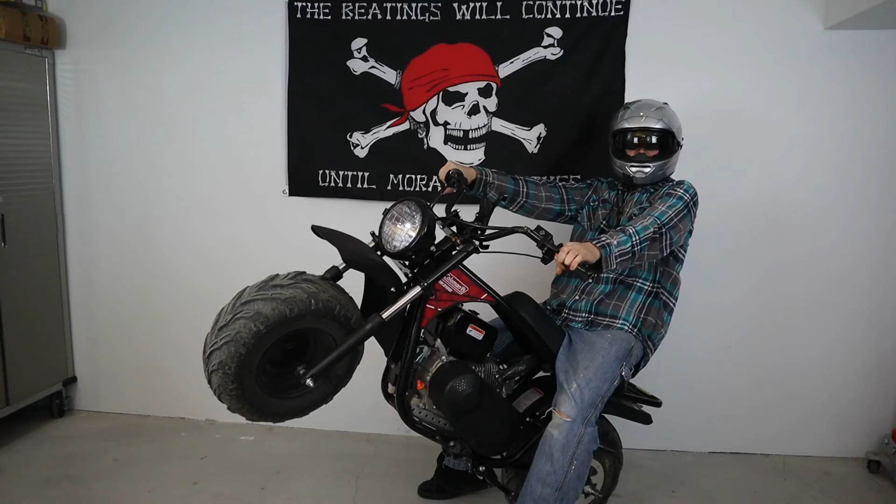I will show you the tools, the parts, and the performance upgrades that you get from it with top speeds. Let's go ahead and throw a baseline measurement in. Let's start with out of the box top speed. Tillotson and a Predator, both 212cc engines.

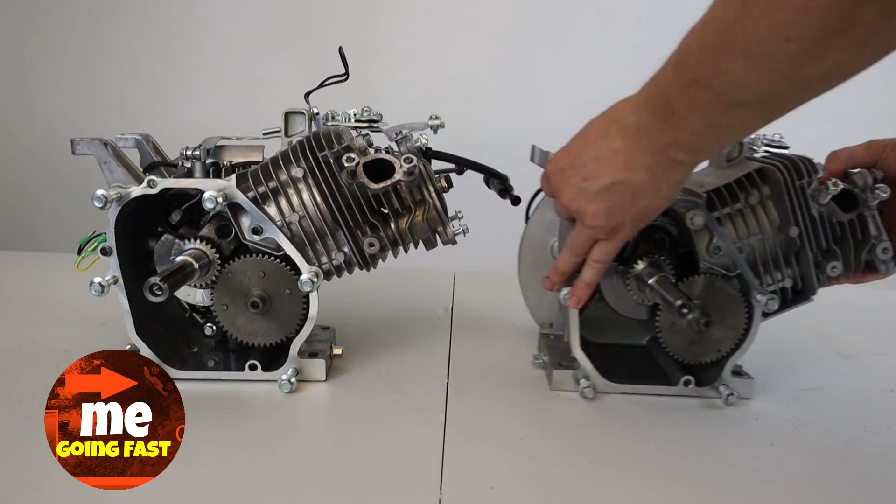Doing an intro, I'm doing an intro now. Isn't it neat? Doing an intro, cause I'm doing an intro now. Look at my feet.

I like mini bikes. I need more mini bikes. So seriously though, this is one of the most comfortable mini bikes that you can get on the market today. It is a very comfortable ride. It is a very nice ride. Well, it wasn't that interesting.

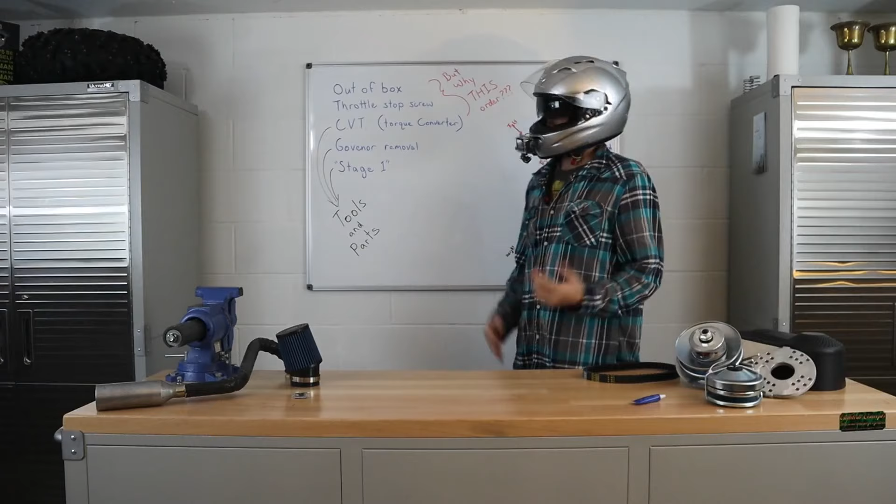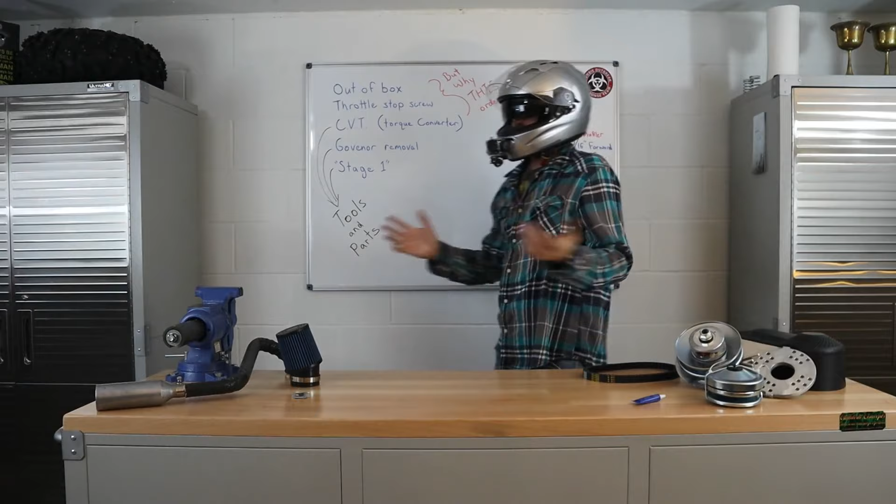Let's pull back the throttle stop screw. The throttle stop screw is what really limits the engine from revving up to where the governor does kick in. We'll get to governor removal later on in this video, but right now let's just take a look at what top speed you're going to get with the throttle stop screw pulled back.

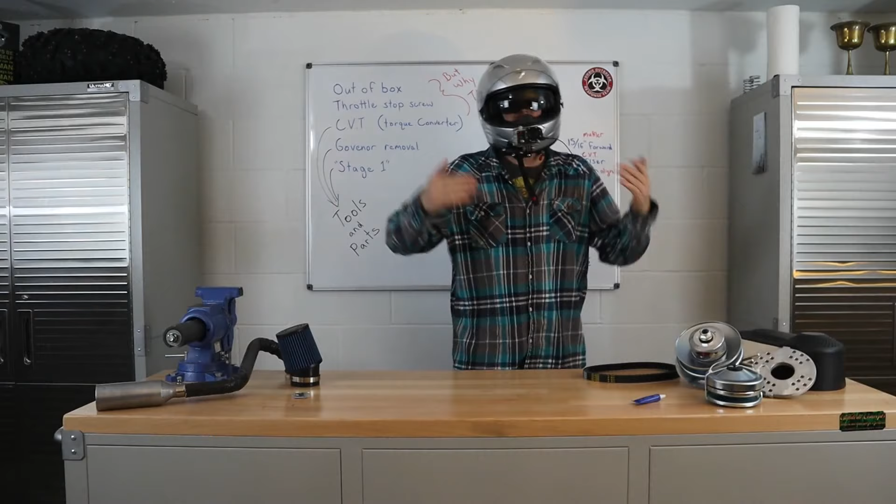Now that we got the throttle stop screw pulled back, you may feel the surging in the engine, and that's the governor kicking in. We're going to add our torque converter right off the bat. Personally, I think that if you add the torque converter first, you're going to get the most out of your mini bike. So if you don't have all the money to put into the stage 1 kit and the torque converter and the risers and all your mini bike upgrades, I'm going to say let's start out with the torque converter. All right, let's take a look at the tools that we need to get that riser made and that torque converter in place.

What we're going to be looking at here is a metal file, a chain breaker right here. Safety glasses are a big recommendation. A safety shield of some sort is also going to be a high recommendation. Hacksaw or another cutting tool. I switched over to a metal grinder, and with the metal grinder you want some hearing protection.

2 9/16 inch wrenches, 8mm, 10 millimeter, 12 millimeter, and then to actually adjust the chain tensioners on the back after we put the new chain in, a 14 and a 17 millimeter. A 3/8 inch drill bit, and what I'm going to recommend is that you take a look at step drill bits. I like preserving them with a little bit of engine oil on the tip, just so they don't heat up and wear out.

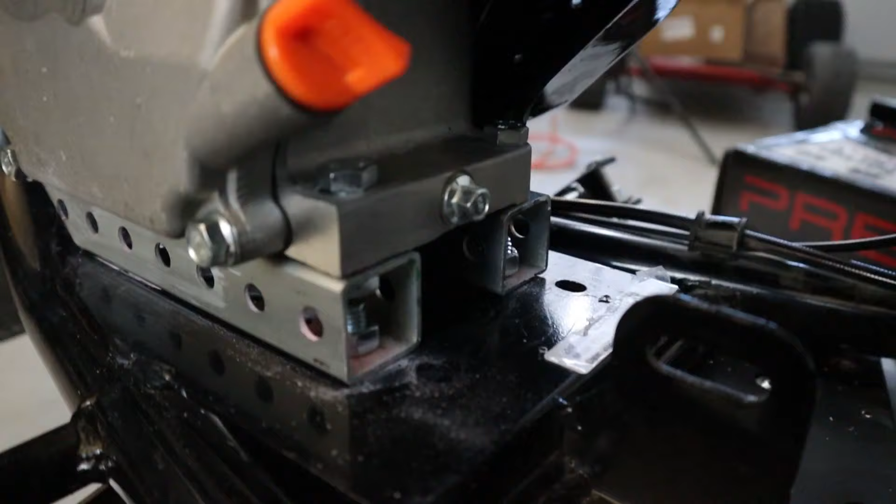Now a little bit of a tip right here is going to be a magnetic reach. I love using a little magnetic reach on the end of a bolt or a nut to be able to place things exactly where I want when I'm aligning things.

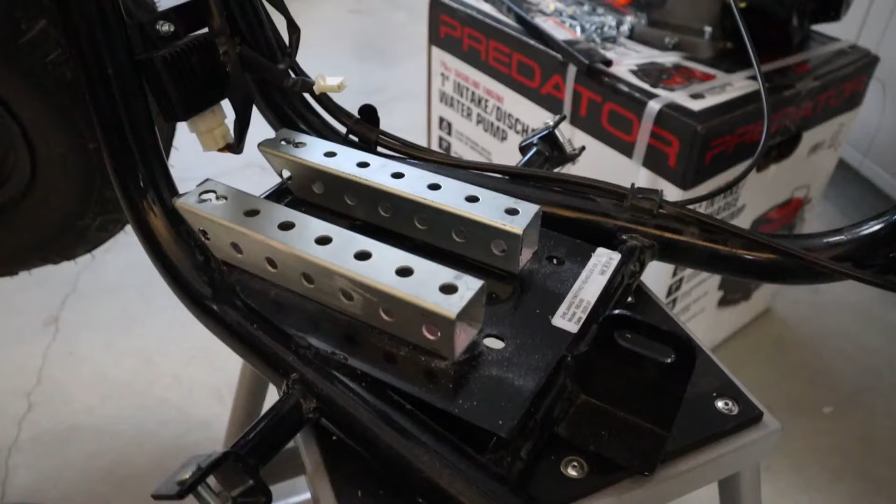Permanent marker. Spray paint. A light colored spray paint is going to be great to mark holes so you get more accuracy in your drilling. Yes, I'm going to be giving you some measurements throughout this video for how to set up the riser or this, that, or the other.

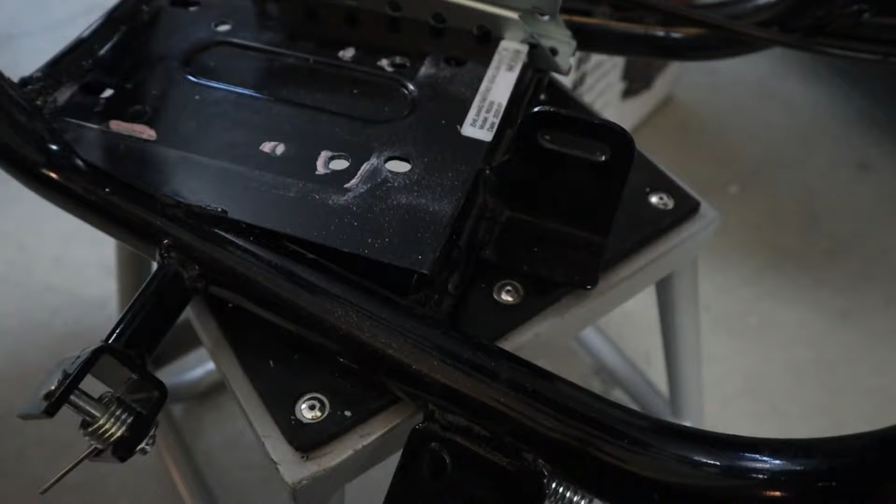Double check your measurements. When the frame comes, it's not going to be exact. Put your risers in place. Put the engine on the risers. Line everything up with the torque converter. Make sure the chain's aligned.

Use a little bit of spray paint just through the edges. A little bit of fine dusting. You can see your holes more easily. But double check your measurements just in case something on one of the parts that you ordered is a little bit different from what I'm working with here. And then the last thing we'll need is a ruler.

Let's get moving forward and take a look at the parts that you need. And then we'll go right into making the riser, putting it on the mini bike, and taking a look at the top speed and the gains that we get from that. All right, let's take a look at the parts. And I'm going to cover these two as well because a lot of people will be asking about them.

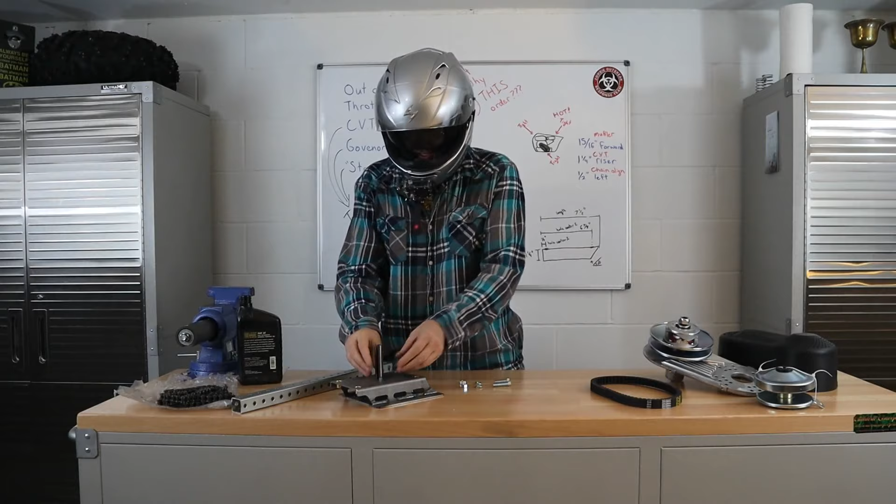Let's look at the parts that you need to actually put the torque converter on. The torque converter itself will be working with a 3/4 inch shaft. With the 3/4 inch shaft, you'll want a 420, 41, 420, 40 chain sprocket on that, and it's going to be a 30 series torque converter, which brings up the first question.

The other larger Coleman bikes use a 16 millimeter, 5/8 inch shaft, and you need to get one of these, which is an adapter.

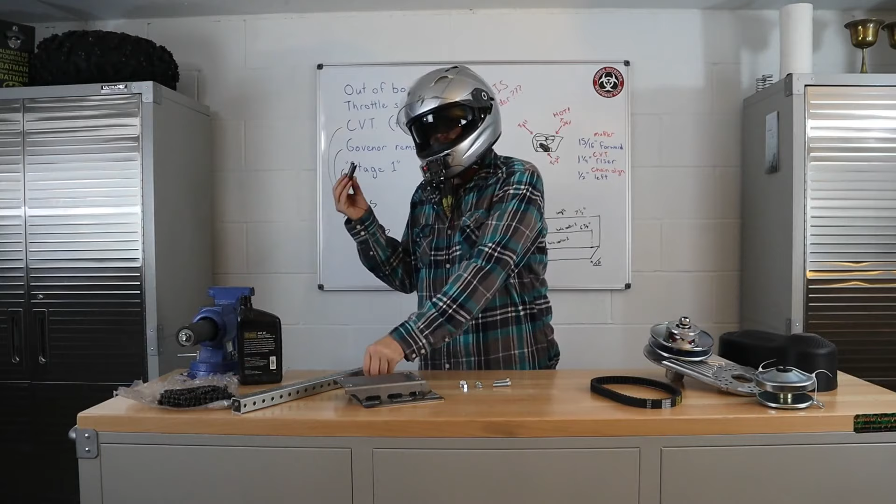The other Coleman mini bikes also have a lot more space inside of the frame, and you can use this guy. This is an OMB Warehouse riser, and that riser helps put the torque converter in the proper place. You will not need this shaft adapter.

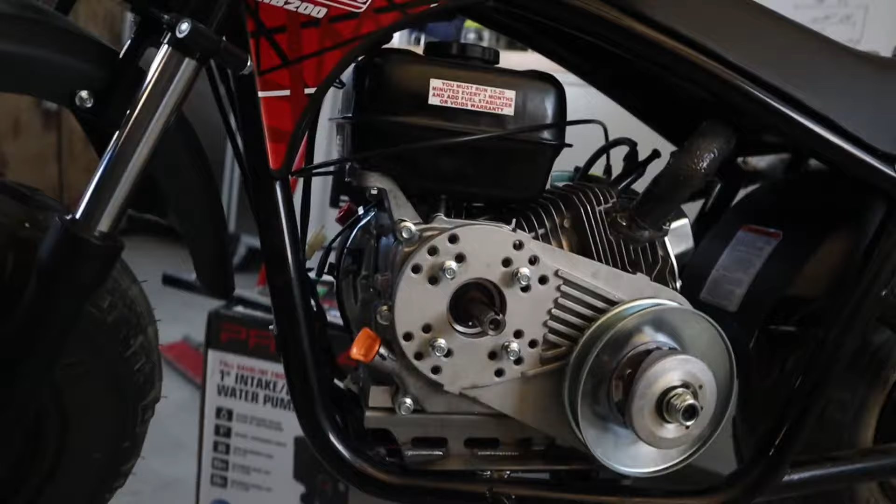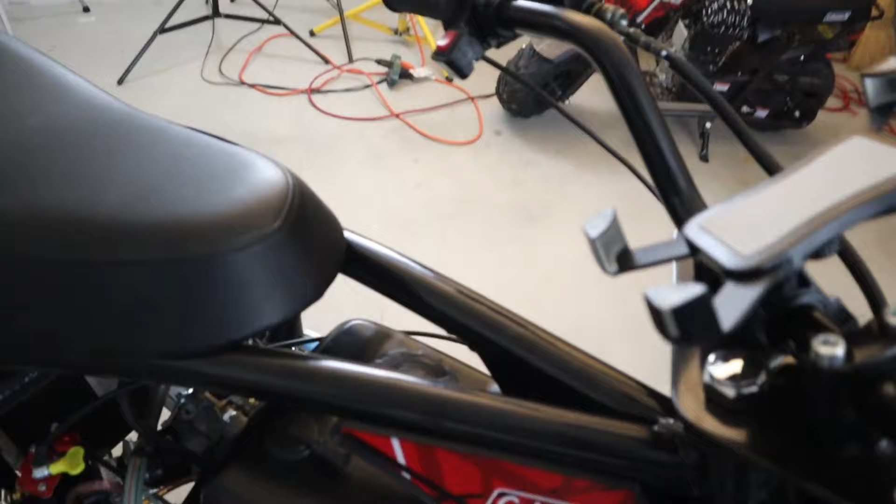The riser will work, however, you are going to have to do some custom drilling either on the riser plate or on the mini bike itself. The riser plate has to be moved forward 15/16 inch from where the current holes are, and then moved over 1/2 inch to the left to align the chain properly. You can only use a riser plate like this if you already have the stage 1 kit installed.

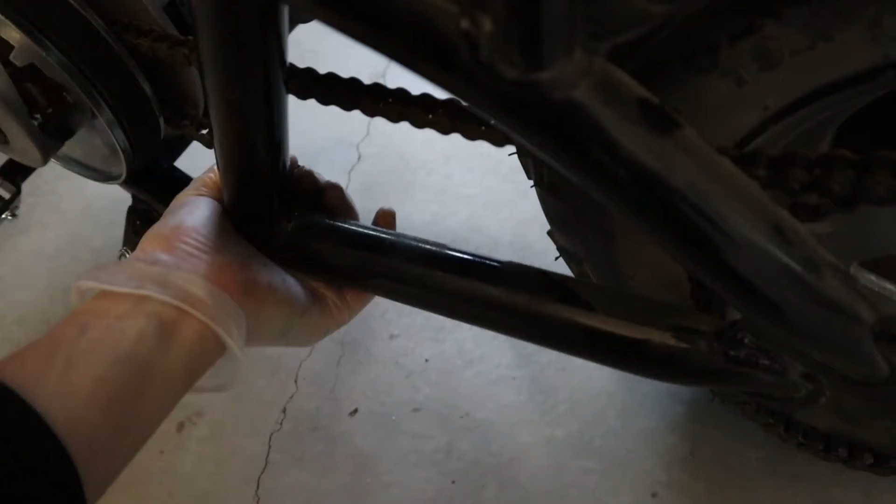Alright, let's take a look at everything you need for the more universal method. We're going to be looking at 2 feet of 1 1/4 inch steel. This is plated steel perforated tubing, with holes drilled every 1 inch. We're also going to need a new chain, since the chain that comes with the mini bike is about 6 links too short.

You'll need a 3/8 inch by 1 1/4 inch bolt with a crush washer and nut, and a 3/8 inch by 1 inch bolt with a crush washer and nut. You're going to need 4 sets of each. The shorter, 1 inch bolts will secure the riser to the mini bike, and the 1 1/4 inch bolts will secure the engine to the riser.

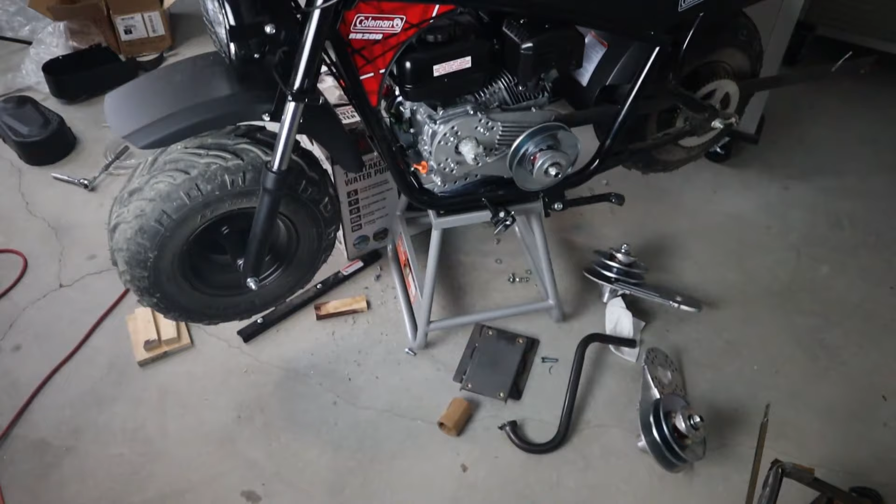Alright, let's take a look at putting those risers in place and that torque converter right on our mini bike and get some gains from that. I do not actually remove the throttle linkage, but I do take off the 2 wire clips on the front, and then I can just kind of pivot the engine out of the way.

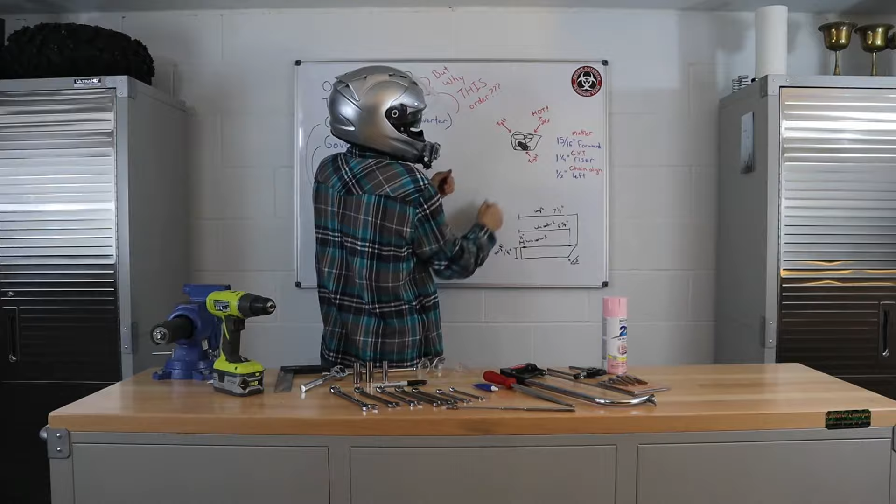So here we have our measurements of where we need to move that engine inside of the frame to make sure everything works out. We need to bring that engine 15/16 inch forward. We have to move it forward because the muffler is going to come in contact with the frame if we don't move it forward when we move it up. And we have to move it up to get the torque converter in place.

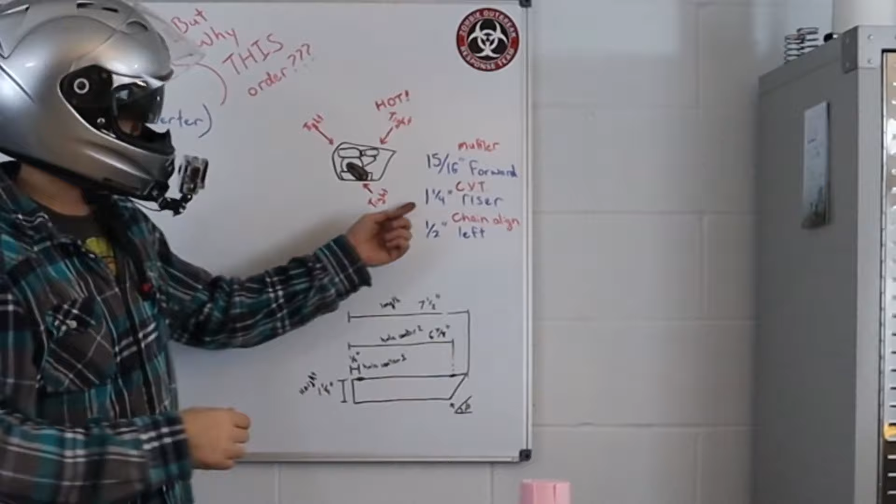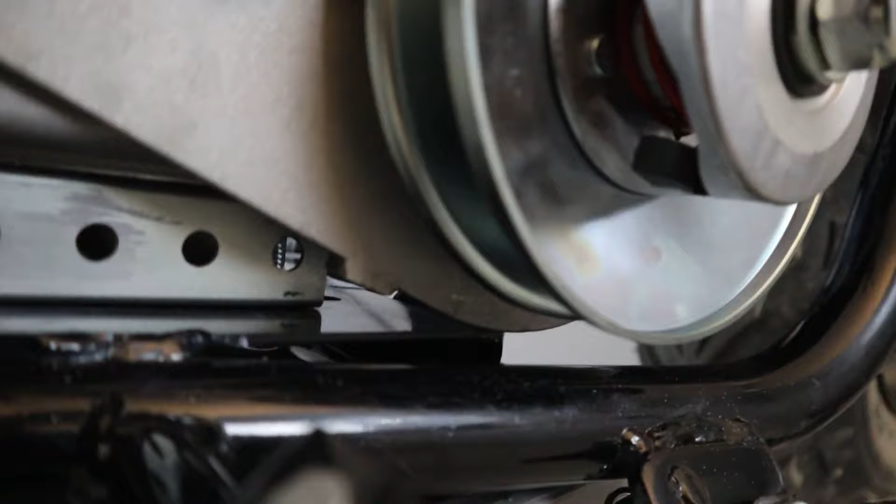We're going to be looking at a 1 1/4 inch riser in order to make sure that our torque converter, our CVT, the pulley guard doesn't actually hit against the frame itself. So we need to get that riser in place.

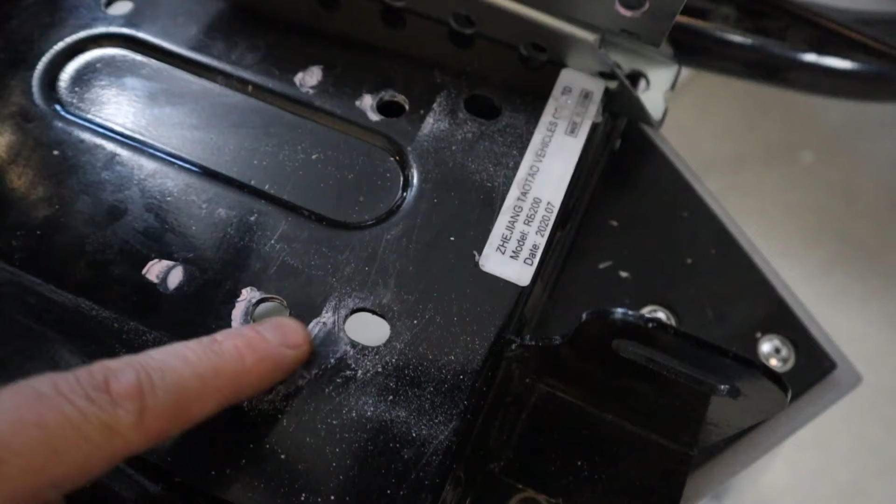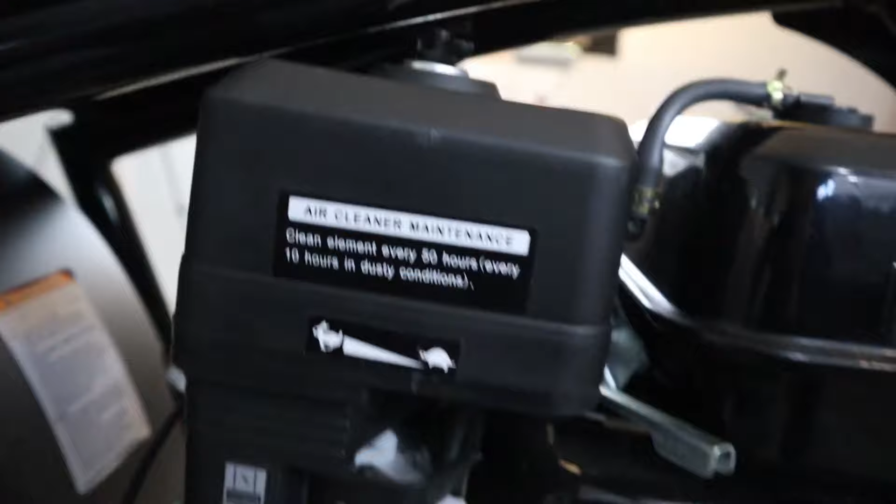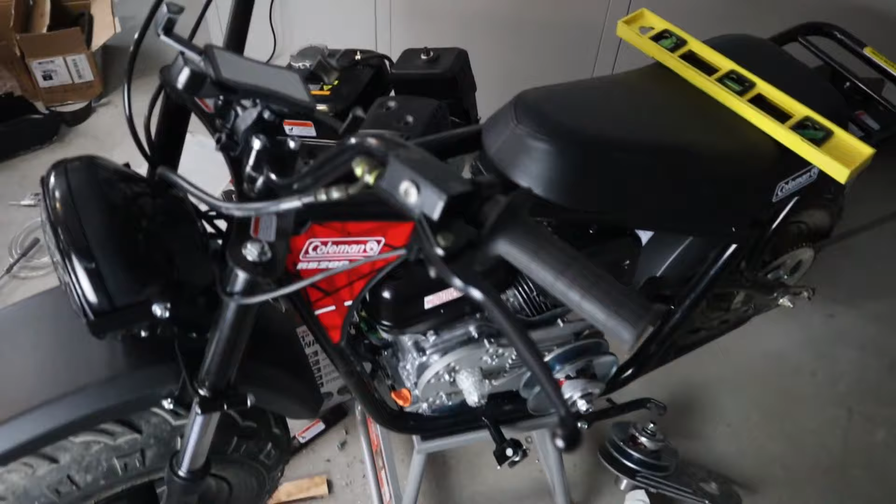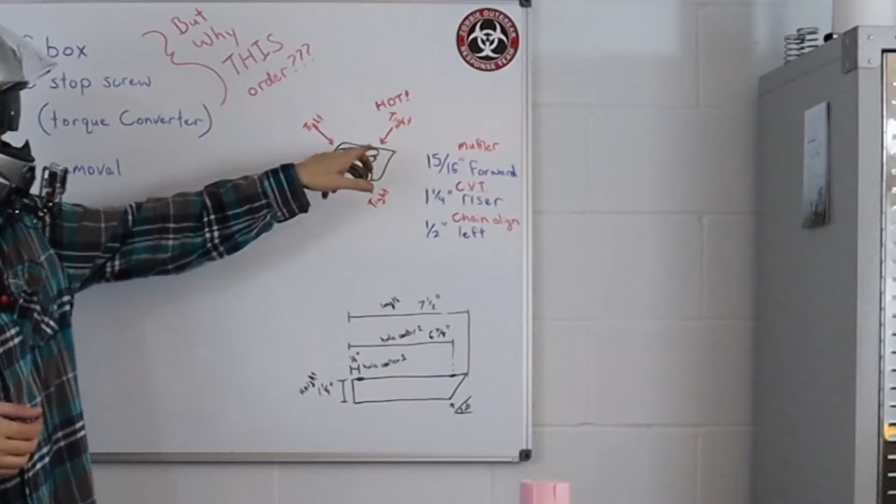This will actually work with the stage 1 kit as well. Tight fitting, very tight fitting, and you do not want your muffler to touch your frame. Do not let your muffler touch the frame.

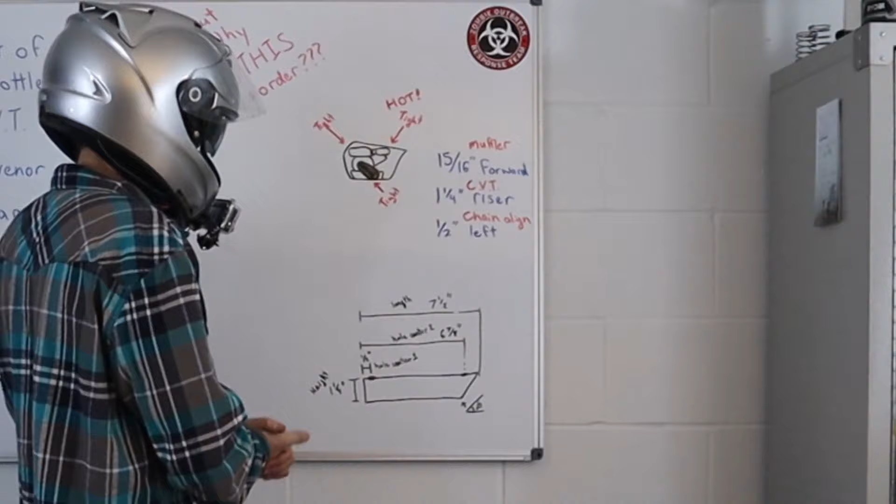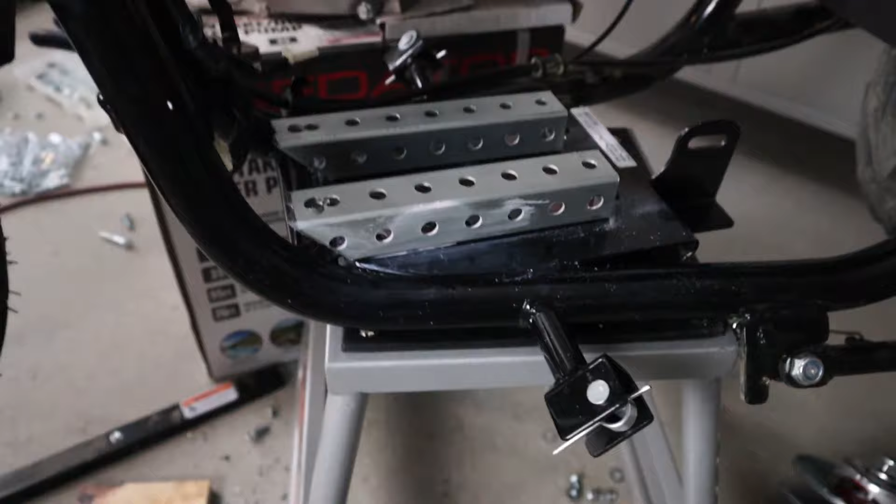Alright, let's take a look at the actual risers themselves. The risers are going to be about 7 1/2 inches long, measured from top point to top point, but we're going to have a 45-degree angle in them to be able to fit them over the top of the frame. So we're moving that forward with a 45-degree angle cut. Our rear hole needs to be about 1/2 inch from the center of the rear hole to the end of the riser.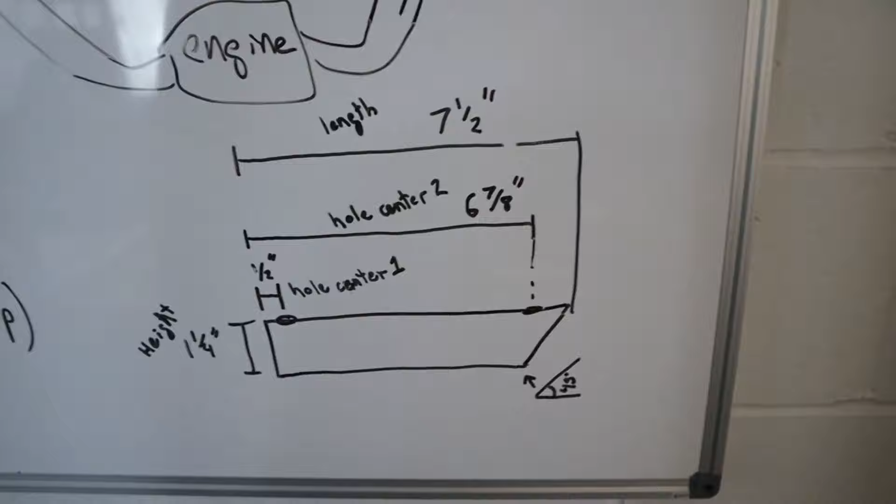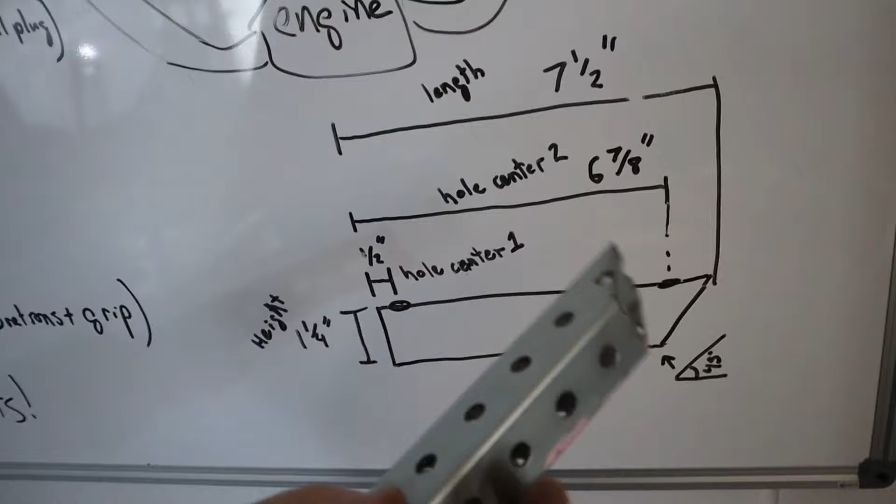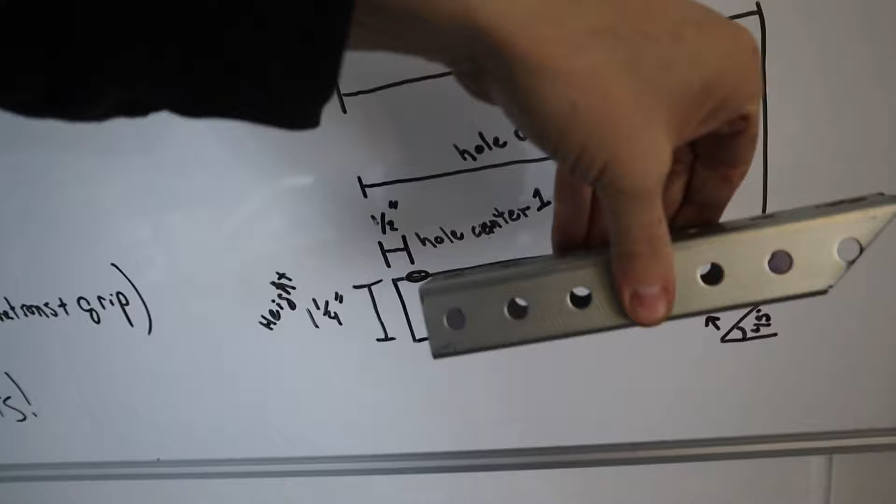The furthest hole away is going to be from the end of the riser to the center of the hole, 6 7/8 inch. So hole 1 is 1/2 inch to the center, and hole 2 is 6 7/8 inch. Then on the bottom, make a 3/8 inch hole, because the hole in the metal itself and the bar may not be 3/8 inch. Just hit it again with the drill bit, a little further in, 2 inches from the end on the far side.

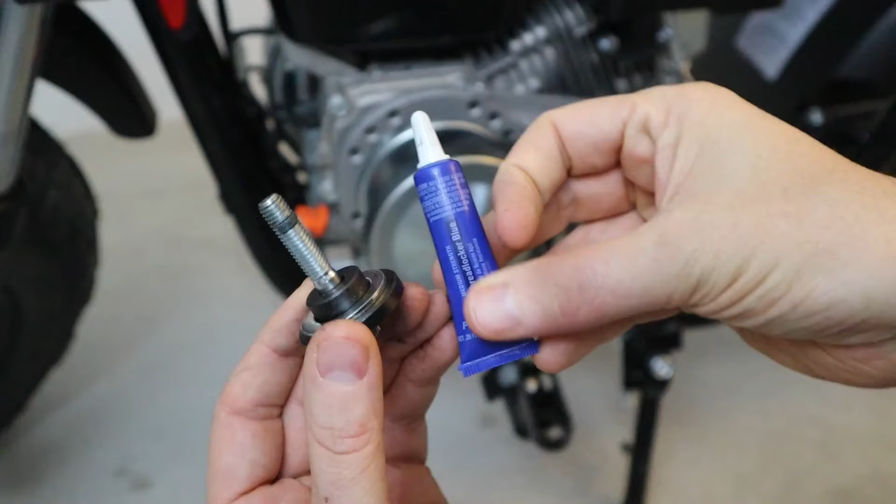You'll need to cut notches in your cover plate.

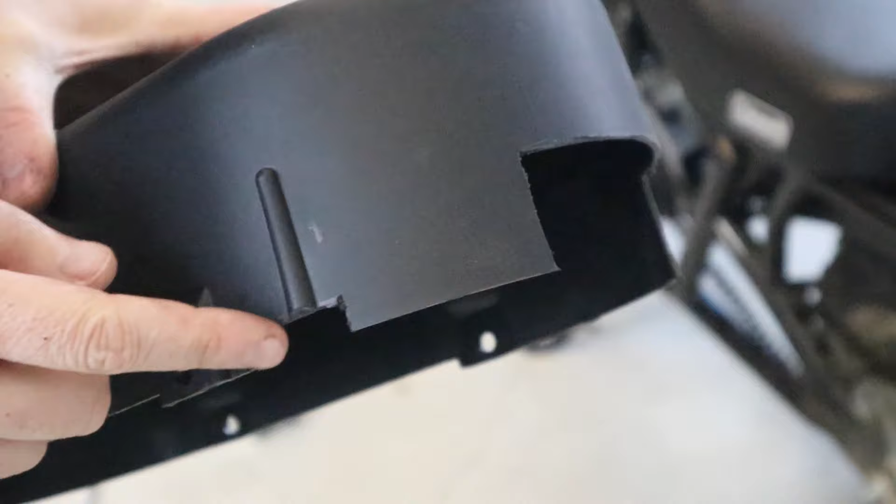A little bit of a skid there. Couldn't slow down before the bump. But, alright, 37. Alright, on to governor removal.

It isn't even necessarily something that you have to do. I mean, risks are going to be on your own. It doesn't really help with performance at this point. You don't have enough torque in your engine to launch yourself to a higher speed. If you do add additional things to improve your engine, yes, that governor removal will show a significant difference, but in this case, you're not actually going to be getting much performance from it.

Take a look at the tools though to get it going. An angled pick coupled with a hammer, 8 and 10 millimeter wrenches, a Phillips head screwdriver, needle nose pliers, and a 5/16 inch tap. Loctite is at the top of our list, but we didn't mention it first — Loctite, Loctite, Loctite.

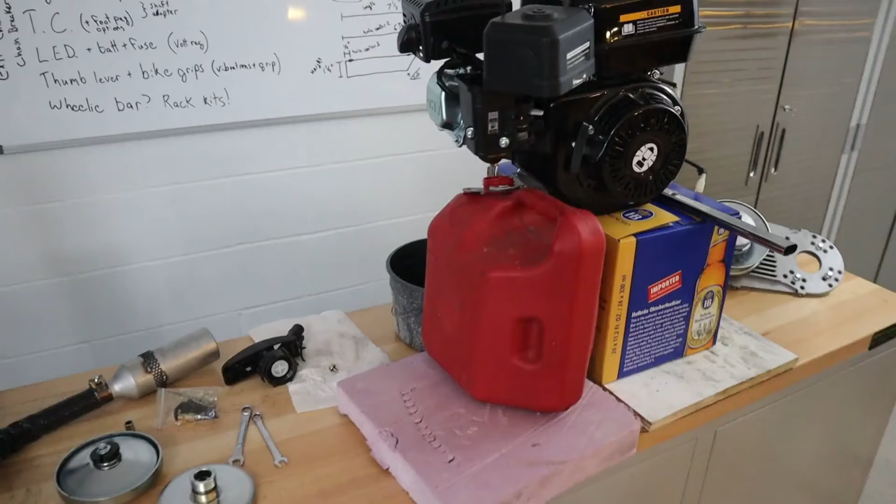Make sure that you drain the fuel and the oil out of the engine before you attempt this, and then you're going to be taking that side cover off.

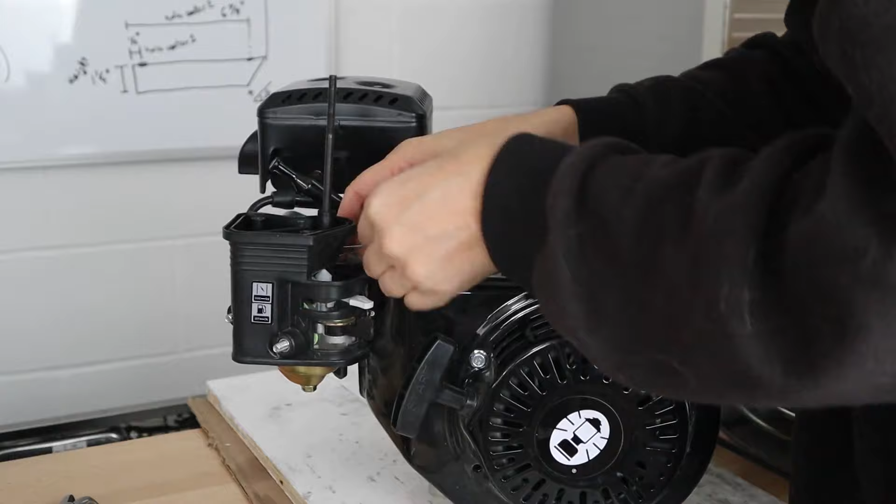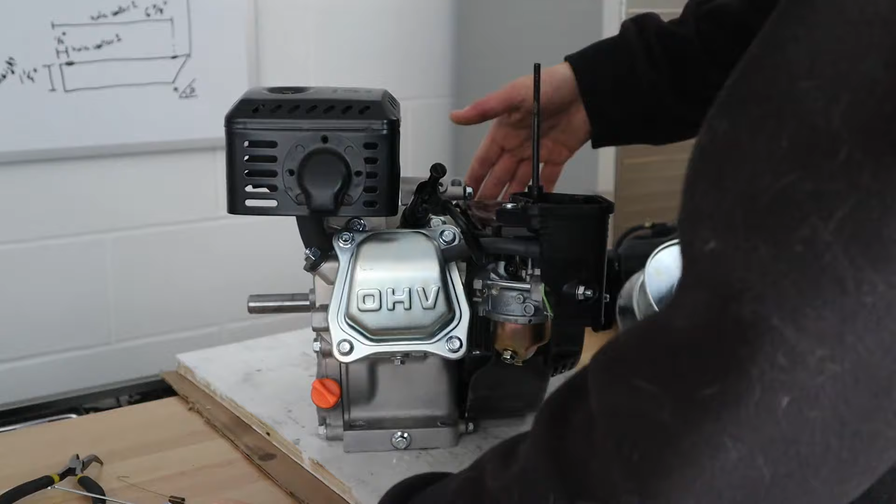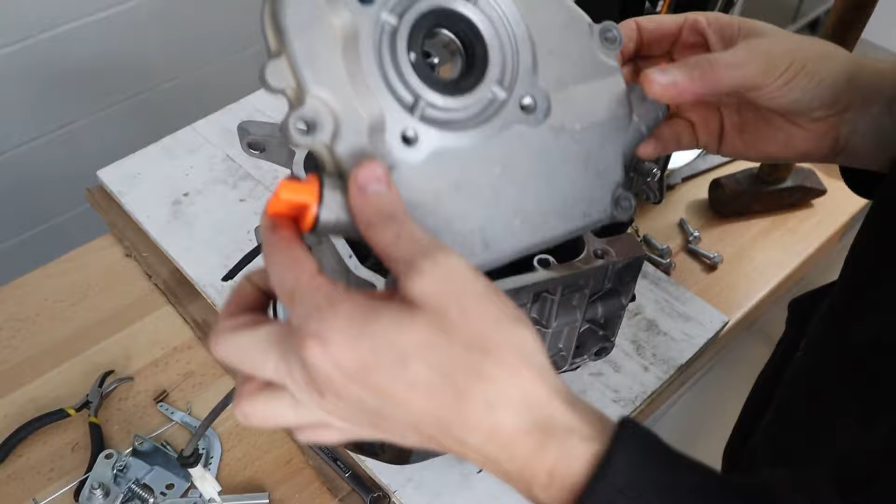I recommend putting the engine with the side cover up so your tappets don't come out and you don't have a problem later on with your valves coming off of the rods, your rockers coming off the rods, which is a common problem when people remove their governor.

Why does it not start? One of the things is remove your valve cover and just check to see if one of the tappets came off when the rods dropped down, and your rockers are no longer aligned.

You can remove the little governor arm that goes up to the throttle control arm pretty easily if you get the piston in the right position. You don't have to break anything off, you don't have to cut anything in advance. Just make sure that your crankshaft is in the right position and you can wiggle that thing right out.

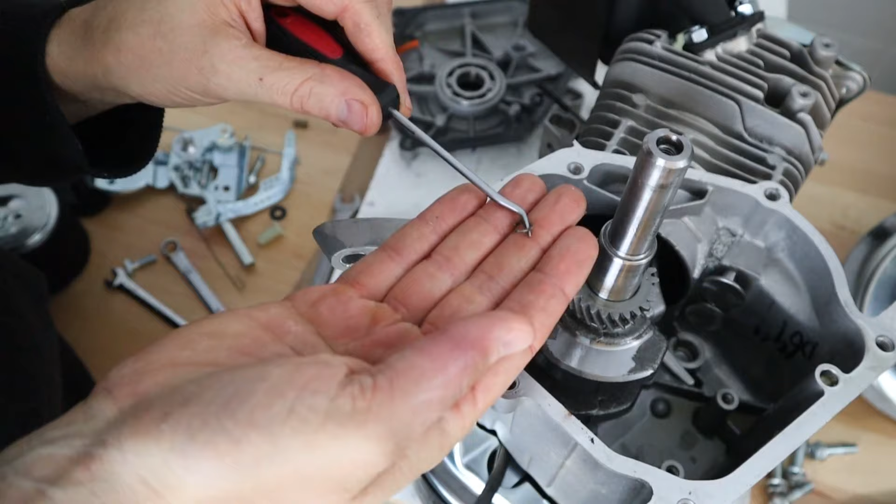I'm going to be taking a hammer to a pick, hitting the pick with the hammer really quick. Around the center of the gear is a little metal holding clip. You got to hit that clip with the pick to remove it. You'll be taking the needle nose pliers and pulling that gear out of there. It goes pretty fast once you've done it a few times.

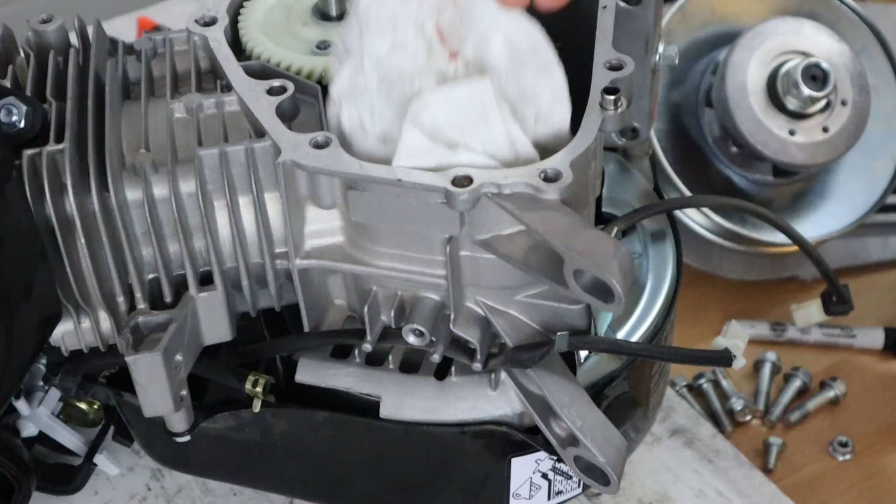When you put everything back together, make sure that your timing and your alignment from the cam to the crankshaft are right in line with one another. You're going to have two dots, and you have to line those up perfectly. Make sure that the tappets haven't dropped down and everything else is in place. Tap the governor control arm, clean the hole outwards of the crankcase, and put the bolt in with Loctite, then put the case cover back on.

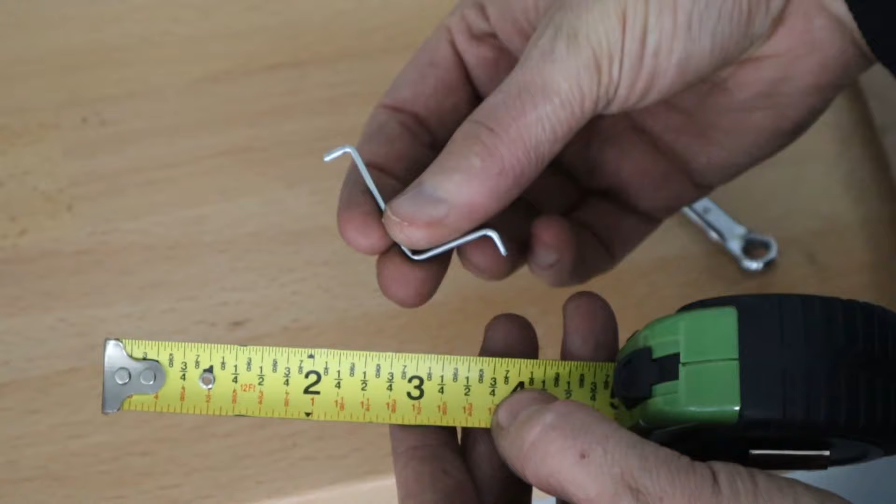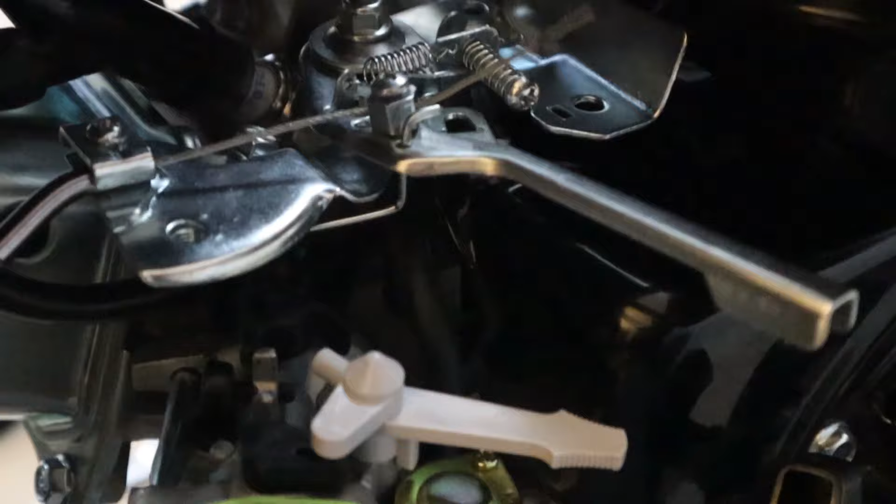For the linkage, take the old linkage rod and mark as needed. It should be roughly 1 1/4 inch long by 3/4 inch tall. Remember to test the throttle linkage before you put the torque converter on. Make sure that it doesn't get stuck, over rev, or not close all the way. You want to make sure everything opens and closes without unexpected action. Don't forget to add oil.

Alright, governor is now removed. We're going to see what's going on. If you notice, the belt is not coming all the way up where I want it to.

So we may play around with this a little bit, but the governor is now off. It is quite peppy, and I'm going to see if I can get better than 37 miles per hour on the top speed run here.

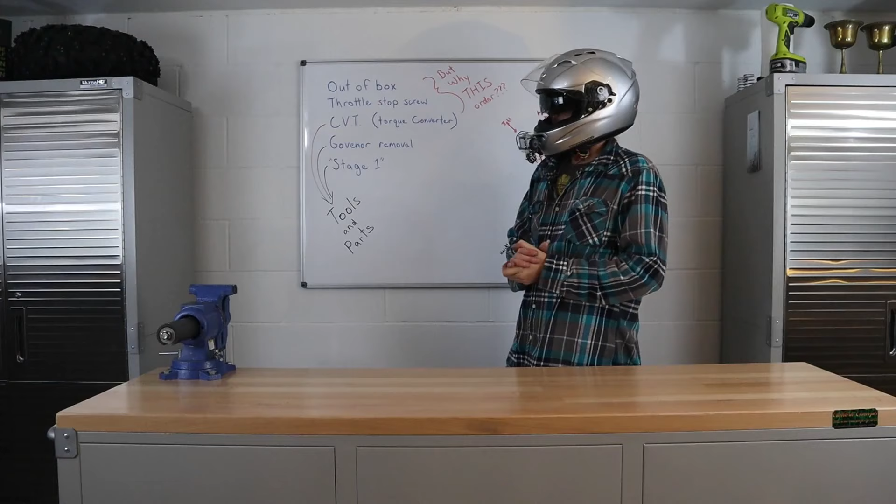So why doesn't the governor removal actually do anything at this point? Well, there isn't enough torque to push your engine hard enough to get that belt to come up all the way on the pulley. So the governor isn't being reached. Your RPM limit isn't being reached because the engine isn't strong enough to push you that far and that hard, which is why we now add a Stage 1 kit.

Alright, let's take a look at the tools that we need for the Stage 1 kit. You're going to need a 13 millimeter for that exhaust bolt, a 10 millimeter socket on a drill, Loctite, a Phillips head screwdriver, and a small flathead screwdriver. That small flathead screwdriver is going to help you change the jet.

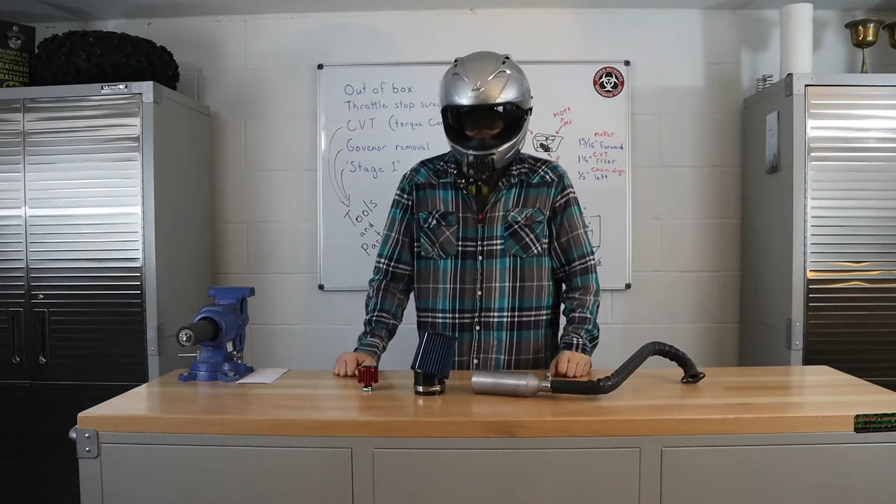All right, Stage 1 parts. What are we going to need for those Stage 1 parts? You're going to need a large air filter and one of those adapters that butts up right against the carburetor, a breather filter, and a size 38 jet—very important, you want your engine to be running properly. And you're going to need some sort of exhaust system.

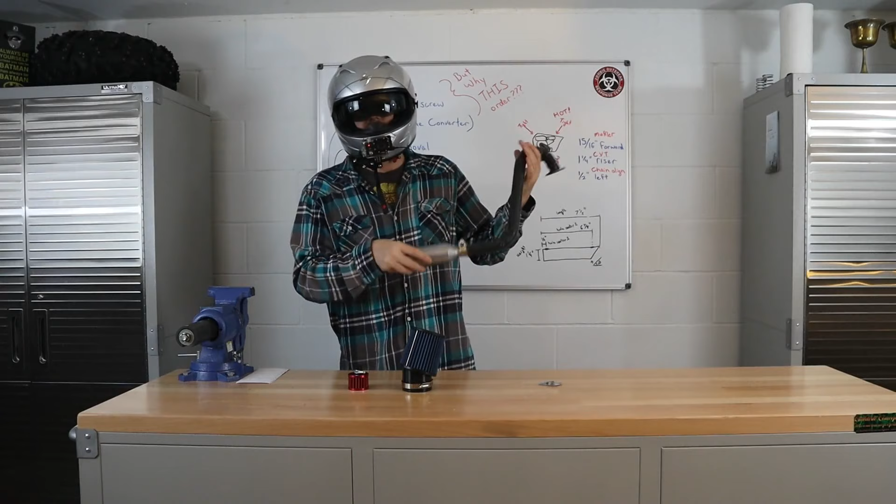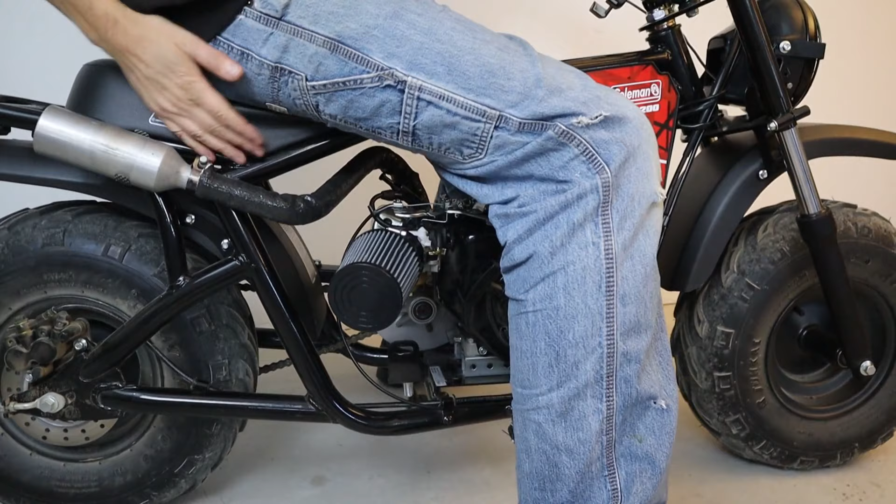So you can take off your muffler with a 13 millimeter wrench and put on your new header with the silicone sleeve in place. Make sure it does not touch the frame—except how you're going to be securing it after all of the heat shielding is in place.

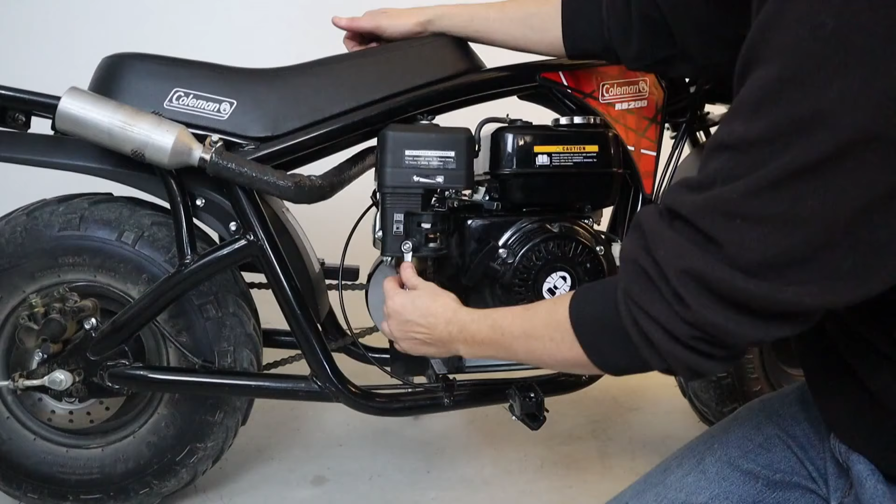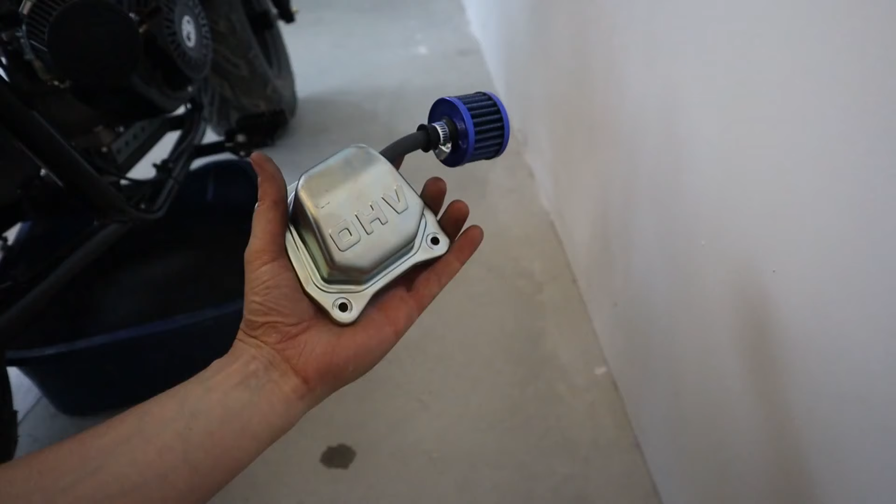The intake is pretty easy, just a 10 millimeter wrench. Pop off the whole intake. You're going to be putting on the new air filter, putting on the breather filter for the valve cover on the tube coming off of the valve cover, and then adding your 38 size jet. You should be good after that. There isn't much to it. You should be tuned and ready to rock.

So let's see what this thing can do. All right, we got everything on. Let's see what she can do. I'm a bit low on gas, but...

Oh, do I do it? Do I risk going on the open road? Alright, well that's a heck of a walk back, so I hope I didn't make the wrong decision.

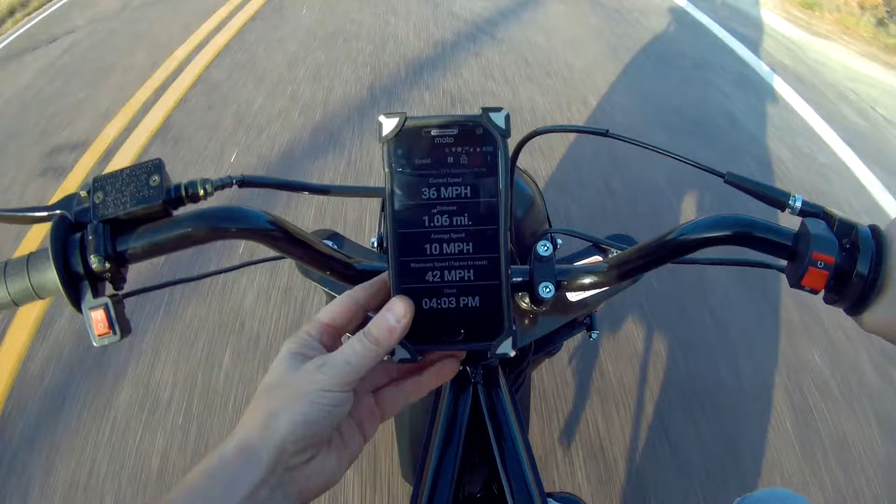Yeah, I had to go on the road because I actually ran out of room. It really wants to take off a lot quicker now, so I got to take it on the open road because you can see here, 42 miles per hour. Yeah, my little street wasn't even long enough. But now with the header, the intake, and the 38 jet, doing 42—yeah, I had to take it out of the street because my little street just wasn't enough for this mini bike.

Oh, 43. So it's getting up there. 43, doing 43. Woo! Punch it!

Mini bike. Well, that about sums it up, right, buddy? He says yes. But we've got almost double our speed from out of the box.